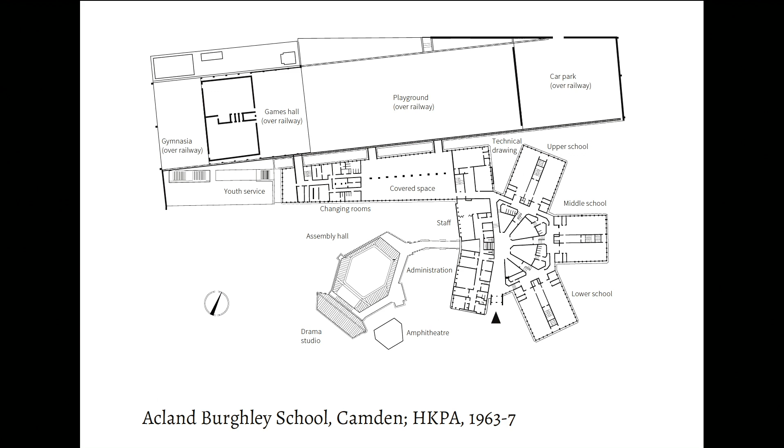Examples in their work include the faceted elevations of the 1959 Churchill College scheme and the prismatic plan of Acland Burghley School. In their work for colleges in Oxford and elsewhere, they applied their expertise in precast concrete to create the more buildable but nonetheless striking form of boxed-out windows, which you see here.

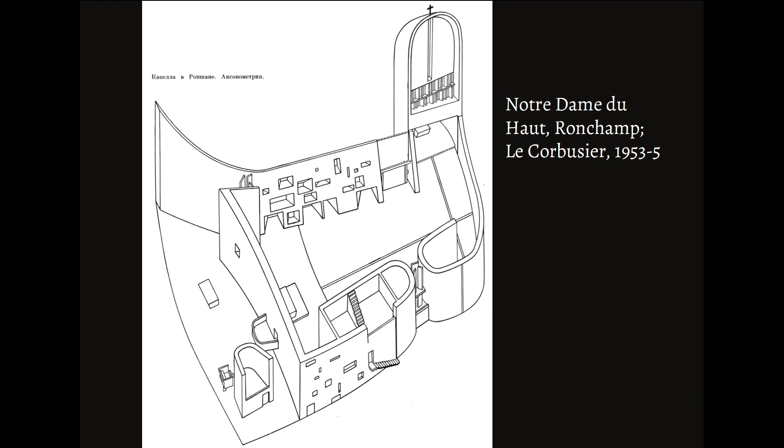Conventionally one would place these trends in the context of the formal freedoms that succeeded Le Corbusier's chapel at Ronchamp and the rediscovery of the pre-war avant-garde. But as I worked my way through the book, it was a revelation to discover that a significant influence on their work during this period was a short-lived but brilliant architect named Edward Reynolds.

He was born in 1926 and died of cancer at the age of 32 in January 1959. Raised in Portugal, he arrived in the London of post-war austerity in 1947. After a protracted period of training, he found his way into the LCC and the mentorship of Bill Howell, who suggested he qualify here at the AA.

He caused a sensation in this building. Peter Cook, a student slightly later, called him the one really original talent of the period, and his influence extended far beyond Bedford Square. In his history of modern architecture, Kenneth Frampton wrote that he exerted a decisive influence on the development of brutalism.

So why has no one heard of him? Today, the name of Edward Reynolds has all but disappeared from living memory. There are only now a few people who knew him firsthand. The story that follows has had to be pieced together from small fragments and clues. It's an incomplete picture, but nonetheless, I think, an intriguing and important one.

Edward Louis Reynolds was the second of 4 children from a well-to-do Anglo-Portuguese family. 2 Reynolds brothers emigrated to Portugal in the mid-19th century, where they established a successful business trading cork and wine. But Edward's mother claimed that he took after her side of the family, who were related to the aristocratic Conde de Benet family. He was born and grew up in Cascais, a coastal town 30 kilometers west of Lisbon, and attended St. Julian's School in nearby Carcavelos.

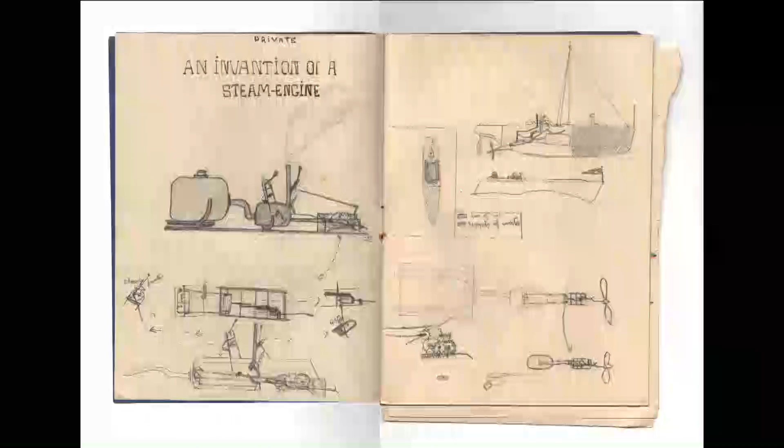His exercise books from his school days are filled with drawings of boats, mechanical inventions, landscapes, people, and horses, but there are also sketches of strange rustic houses accompanied by precisely annotated plans. And he started to study architecture off his own bat.

Reynolds' architectural ambitions were encouraged by his family, and after the war, his aunt Christina arranged for him to be articled for 6 years to S.B. Caulfield, an architect based in South Kensington, while he studied part-time at the Regent Street Polytechnic School of Architecture. Reynolds arrived in London in August 1947, 4 days before his 21st birthday.

Sidney Burgoyne Kitchener Caulfield, then aged 70, was a living link to the Gothic revival and the arts and crafts movement, having been articled to J.L. Pearson and led the Department of Architecture at the Central School of Arts and Crafts from 1910. He talked of W.R. Lethaby, Edward Johnston, and Eric Gill. But by 1947, his practice was subsisting on war damage reparation work and must have felt as much of an antiquity as the system of pupillage itself.

Reynolds befriended 2 bright young assistants. The first was Arthur Baker, who in 1950 went on to join the LCC Architects Department, working under Bill Howell, Gillian Sarson, John Killick, and Sandy Wilson on housing projects. It may be that Arthur Baker introduced Reynolds to this group, although he doesn't now recall doing so.

The Poly was a conservative school. Its continuing commitments to the orders and to line and wash renderings can be seen from Reynolds' second-year Doric study. It was run by older, rather remote figures. The classicist John S. Walkden was the overall head of the school, with Gordon Topliss and Robert Meadows in charge of the day and evening schools, respectively.

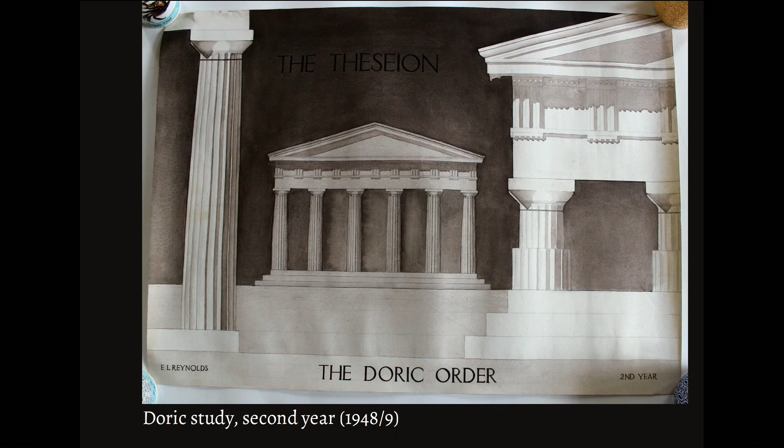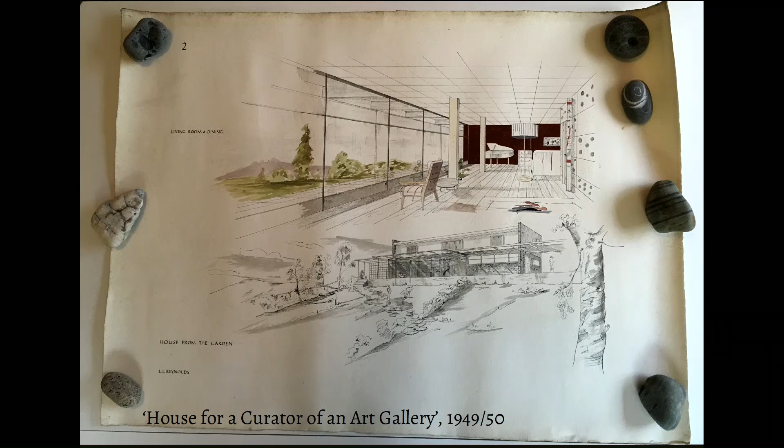The younger tutors, however, tended to be practitioners with a closer connection to the modern movement. Despite this somewhat less than inspiring environment, Reynolds' drawings suggest that he was navigating his own course through a changing architectural landscape. His third-year project, A House for a Curator of an Art Gallery, with its concertina glass screen, rubble end walls, and timber pergola, suggests the vernacular modernism of Bentley Wood, Serge Chermayeff's pre-war house, or the houses designed by Marcel Breuer after his arrival in the United States, while the render and framed picture windows perhaps reflect a Scandinavian influence.

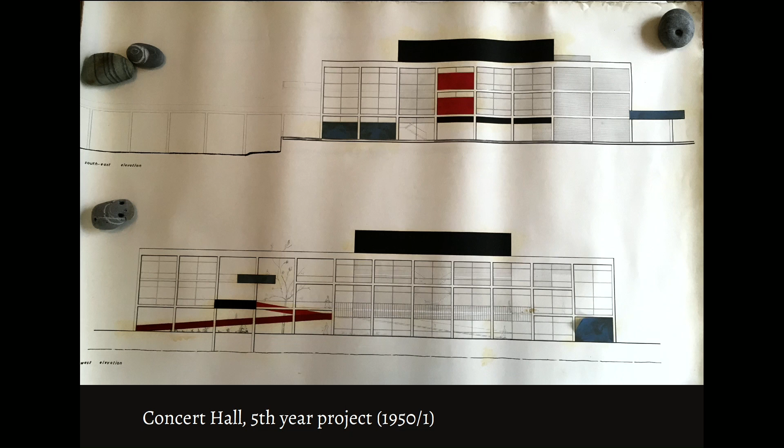By 1951, the year of the Festival of Britain, a pure rationalism is apparent in his fifth-year project for a seaside concert hall, in tune with his hero Mies van der Rohe, the Smithsons' Hunstanton School, and their efforts to 'find out how to use Mies's methods without any mannerism.' This seems to be a reinforced concrete frame, a material he would become strongly associated with. The ramps and balconies threaded through a square grid of columns suggest an awareness of Giuseppe Terragni, while the pier-like structure seen on the top right seems to extend out into the sea. The scheme is rendered in a single thin line, with Mondrian-like blocks of primary colours pasted on.

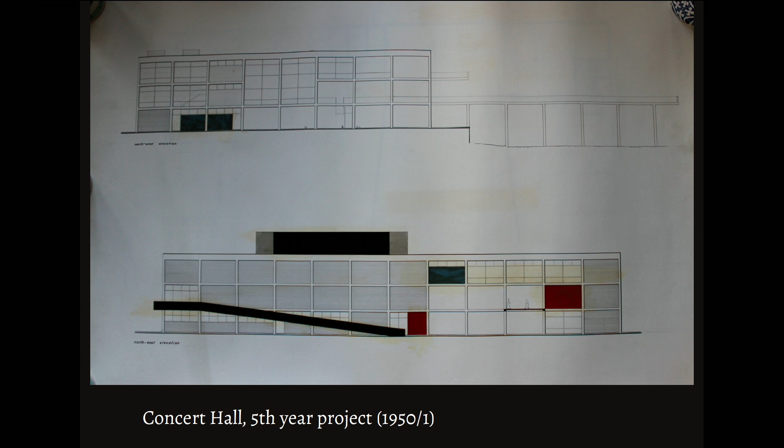His contemporary project for a debating hall at Regent's Park is a full-bloodedly brutalist essay in board-marked concrete, complete with random fenestration and exposed downstand beams.

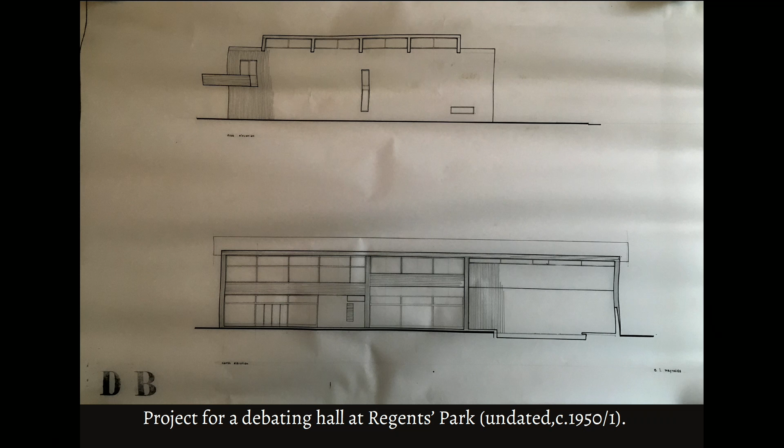Reynolds left the Regent Street Poly in about 1952, having gained the RIBA intermediate qualification. He next took a short-lived job with Tripe and Wakeham, a firm then specialising in industrial and newspaper buildings. Peter Womersley was working there at about the same time.

In October 1953, Edward got married to his fiancée, Anne Russell. She was an interior designer from Northern Ireland, working for Casson & Conder, later at the furniture and display section of the LCC Architects Department. Edward had met Anne through a friend from the Polytechnic, to whom she was then engaged. He introduced himself as Pedro, and only later did she find out his real name. Much later, some of his colleagues and acquaintances would refer to him by the same nickname. Perhaps England brought out his Portuguese side, and vice versa.

In March 1954, Reynolds joined the LCC Housing Division, then at the peak of its post-war reputation. He was soon assigned to the team working on the Roehampton Lane estate, later known as Alton West. This group was headed by Colin Lucas, pre-war renowned as one-third of Connell, Ward and Lucas, but directing the design were Bill Howell, John Killick, John Partridge, and Stan Amis. Partridge had entered the LCC in the 40s at age 18, but the other three were ex-servicemen who'd met at the post-war Architectural Association.

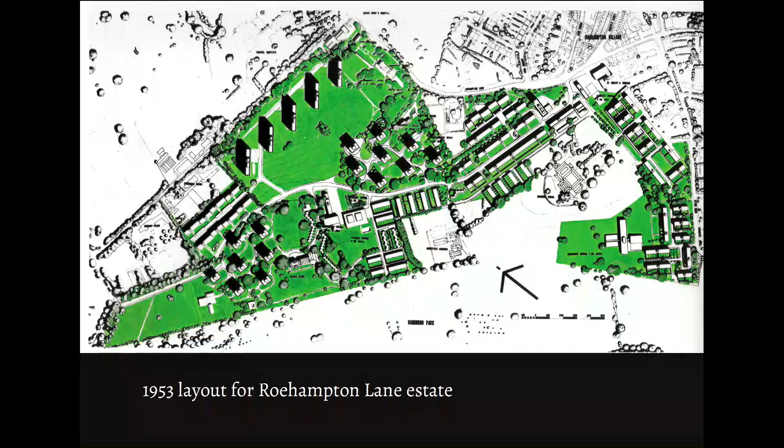Their concept was based on Le Corbusier's unrealized plan for Saint-Dié, combining groups of tall blocks with short terraces to preserve a fine landscape while maintaining a relatively high density. By the time Reynolds arrived, their layout had been approved by the council, and Howell, Killick and Partridge were overseeing detailed design and construction. Reynolds was one of a number of assistants in the team, a role more associated with drawing than with designing. Nonetheless, he was allowed to make two significant creative contributions.

The first concerned Howell's five 12-storey maisonette blocks that stand sentinel over Richmond Park. Their imagery and proportions were clearly derived from the Unité d'Habitation in Marseille, although their planning and internal layout were quite different. In place of the Unité's colossal pilotis, a grove of slender cylindrical supports was substituted for pragmatic reasons, more akin to Corbusier's pre-war work.

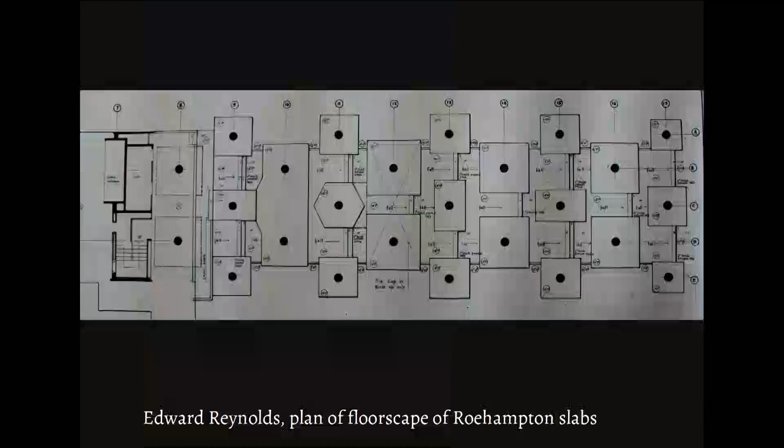For the teams designing a large housing complex, the drawing out and detailing of standardized bays and plans was occasionally relieved by a piece of one-off design. The brutalist jeu d'esprit of the Roehampton boiler house proudly proclaims the district heating system, which served the tall blocks on the estate. A boiler house, based on its specifications, was one of the AA projects set for several years by fourth-year unit master John Killick.

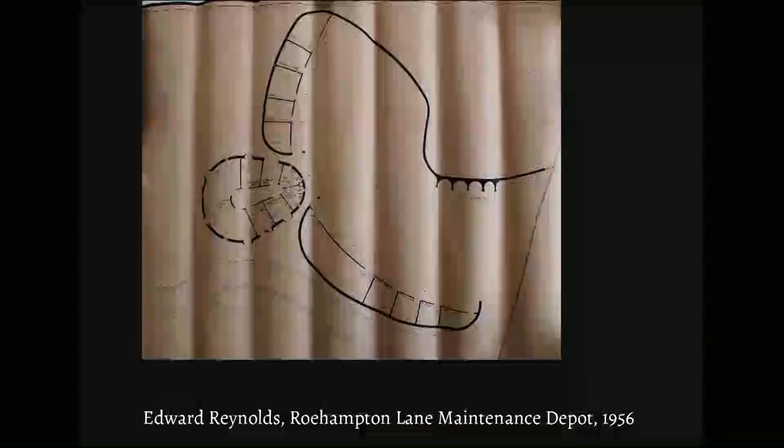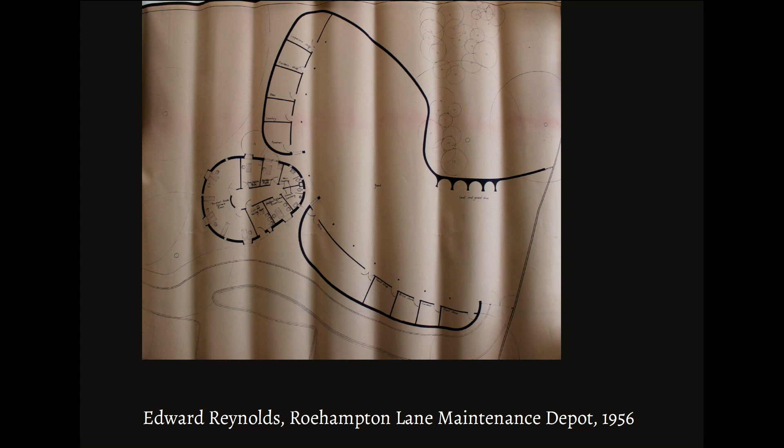Reynolds was given a free hand in the design of another ancillary building at Roehampton, the maintenance depot. His original design of March 1956, seen here, has recently been rediscovered. A modified version was published in 1959, but it was never built. The works yard is enfolded by curved screen walls of board-marked concrete, studded with randomly disposed boxed-out windows. A blob-like pod of offices pushes into the membrane-like perimeter wall, like a collection of cells under the microscope. The curvilinear plan hugs the contours of a sloping site and skirts around mature trees. Its sculptural form and elaborate fenestration was presumably justified by the fact that it would have been overlooked by adjacent housing.

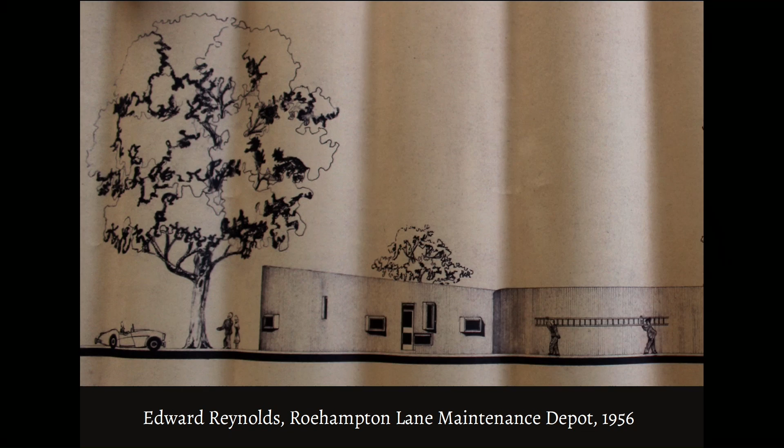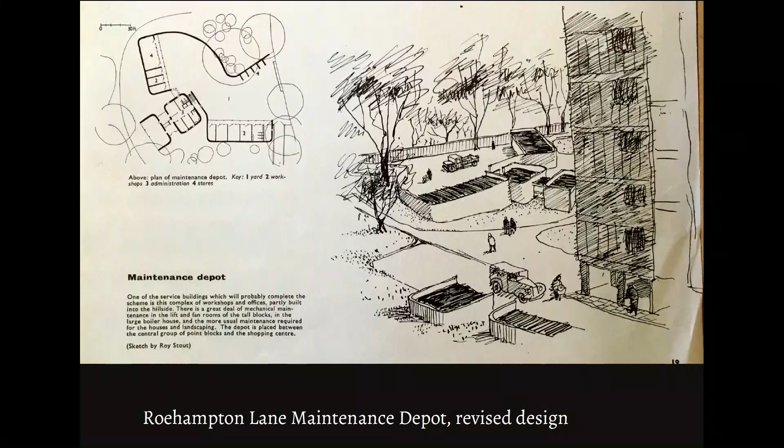After Reynolds left the LCC, his design was rationalized, with the freehand curve straightened and boldly radiused corners added. Writing in the AA Journal, Howell describes Reynolds' design as an interesting piece of early 'curly' - apparently an AA term of the period. John Partridge associated it with the fifth-year tutor, Peter Smithson, and his disapproval of post-Ronchamp formalism at the AA. Partridge's own 1958 competition entry for an infant school at Wokingham clearly shows the influence of Reynolds' design.

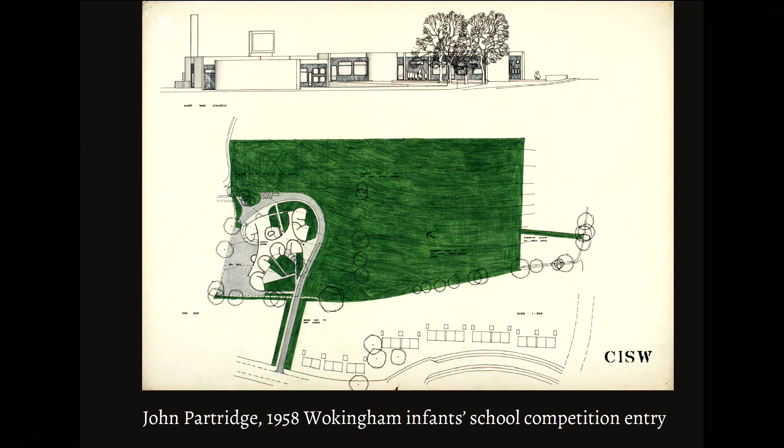Roy Stout, another assistant in the Roehampton group, sat at the next drawing board to Reynolds and remembers him working on a personal project - we're not certain what - which already combined Corbusian influences with his own non-right angle geometry. He clearly had creative potential, yet, according to Howell, he was suffering from low morale or self-doubt. Howell encouraged him to complete his architectural qualifications at the AA, where Killick was by then fourth-year master. Edward Reynolds gained a major county award and enrolled at the fourth year of the AA in autumn 1956.

But before looking at his AA projects, I want first to explore his network of contacts in that period. Reynolds was 30 when he entered the AA, a mature student and older even than most of the ex-servicemen who arrived at the post-war AA. Bill Howell, for example, was 26 when he joined the fourth year in 1948.

Students in the upper years tended to spend less time here at Bedford Square than the earlier years, doing much of their designing at home. Yet Reynolds' presence at the AA was noted by James Gowan, a third-year tutor, who wrote: 'In the studio, as I bludgeoned my students into action with customary delicacy, Edward Reynolds, a year or so ahead and working on his elegant projects, would look up from time to time and exchange a quiet smile.'

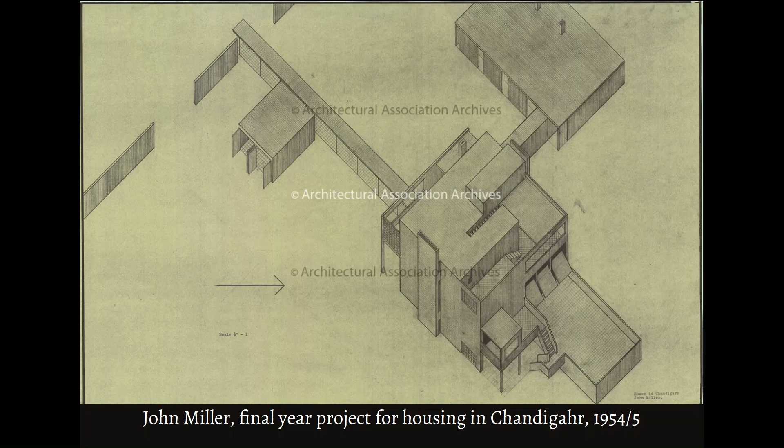The classic example of this is the 1950 cohort, which included Patrick Hodgkinson, Neave Brown, John Miller, Adrian Gale, and Kenneth Frampton. By 1956, however, Principal Michael Pattrick could already draw a distinction between the students of the immediate post-war years, with their belief that prefabrication and the machine might impose order, and a recent trend towards a coarse and robust architecture.

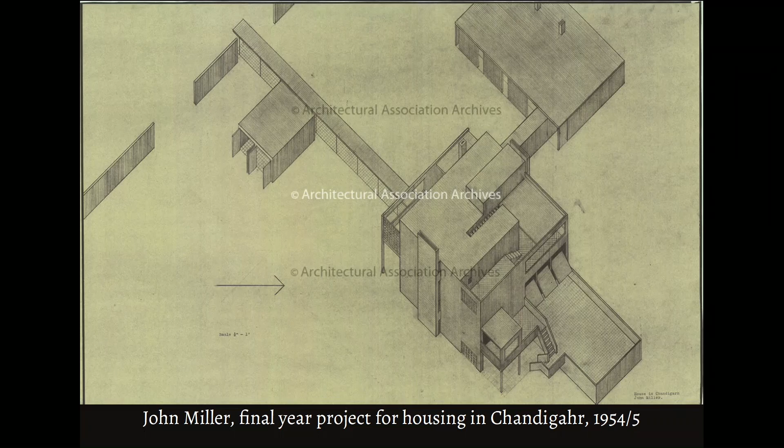Characterized by solid walling and small, irregularly disposed windows. The third-year tutor, the late Leonard Manasseh, attributed the 'farouche air' of that year's summer exhibition to a rush of Ronchamp to the head. Of the following year's summer exhibition, dominated by the work of Reynolds and his friend Carregat, Pattrick commented: 'Today, the general mode of expression is for the irregular, the severe, the brooding, and sometimes the convulsive.'

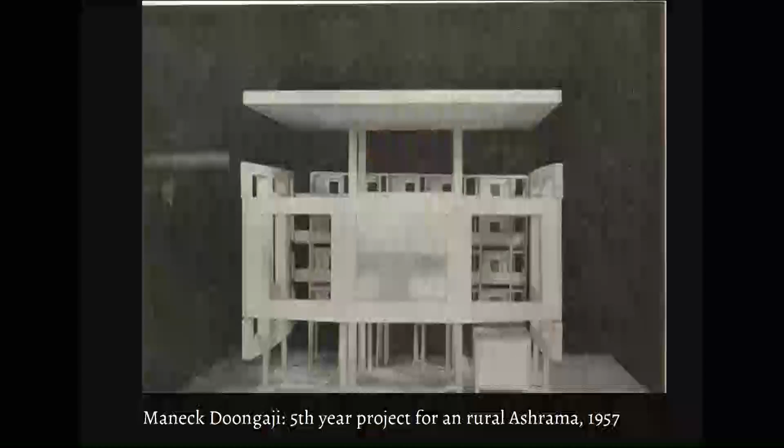Along with late Le Corbusier, there was a renewed interest in the Mediterranean, the East, and so-called primitive art. Manasseh also drew attention to a growing interest in Antoni Gaudí, citing a strongly modeled project for a city centre in Mumbai by Maneck Doongaji. Doongaji's final year project for a rural ashrama in Mumbai state dazzled everyone, recalled Gowan. The design, an open-work concrete cube with a curved parasol, was like an exploded diagram of Corbusier's governor's palace at Chandigarh.

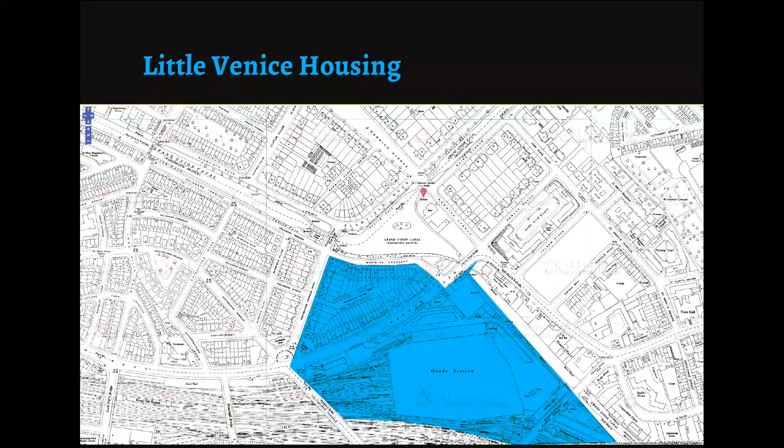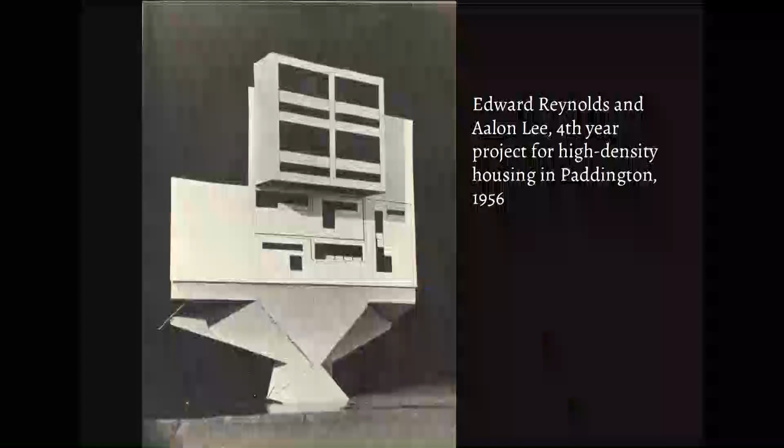Aalon Lee came from a wealthy Shanghai family who fled to Hong Kong after the Communist Revolution. We know almost nothing about the project. No drawings are known to survive, and the sole piece of evidence is a single photograph of a rather rough and ready cardboard model. It's described in one publication as a part model, which implies to me that the model is a portion of a larger scheme. In any case, it shows a four-story structure raised on a vaulted undercroft. Underneath a unité style of projecting balconies is a disordered array of L-shaped windows. Perhaps this represents the front and back walls of alternating maisonettes.

The concert hall at Trafalgar Square is Reynolds' best-known work. In Peter Cook's estimation, it was, and is, the most original shape to have come out of the AA during the second part of the 20th century - 'somehow total, somehow inimitable.' It was completed in the spring term of 1957 as a group project with Aalon Lee and Paul Drake. Drake, too, had made the transition from the Regent Street Poly to the AA. He met AA graduate Peter Ahrends while working for Slater, Moberly and Uren on Sanderson House, and spent the rest of his working life at Ahrends, Burton and Koralek.

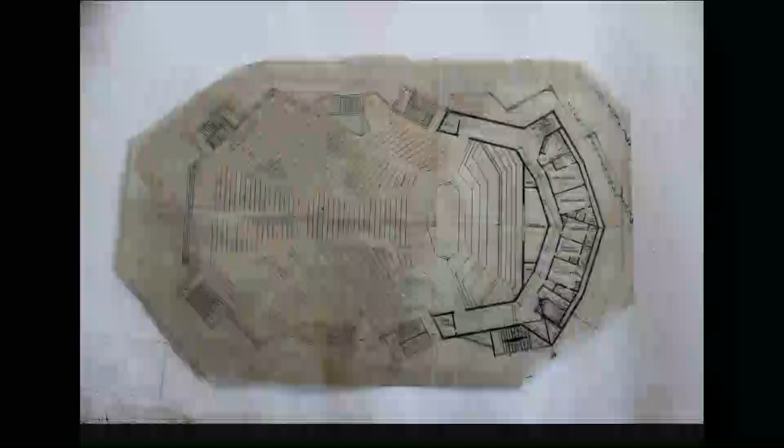The project was based on the so-called Hampton site next to Wilkins' National Gallery, the Hamptons department store having been cleared after bomb damage. It was for many years a car park until it was redeveloped, of course, as the Sainsbury wing of the National Gallery. In his youth, Reynolds had enjoyed going to Lisbon's Opera House. According to Paul Drake, he was not much interested in music, but fascinated by people. The plan of the AA concert hall was as much based on the ritual of concert going - the arriving, the socializing, the people watching - as it was on the performance.

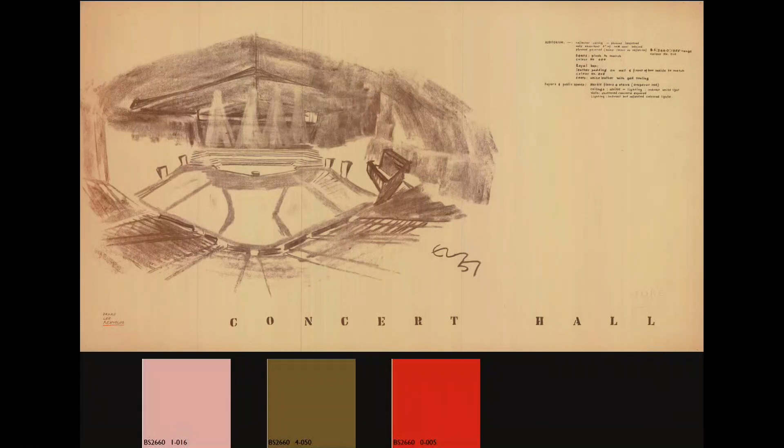By splitting up the seating into angled groups, the intention was that the audience could see each other and their reactions to the performance. The faceted treatment of the exterior was justified by the auditorium design with its steep rear rake, angled rows, and acoustic reflector ceiling.

We have some of these drawings on display here. The auditorium was to be lined in lacquered plywood, a hazy mauve in colour, with olive green velvet seats, and a royal box in poppy red padded leather. Reynolds' specified colour references can be seen at the bottom of this slide.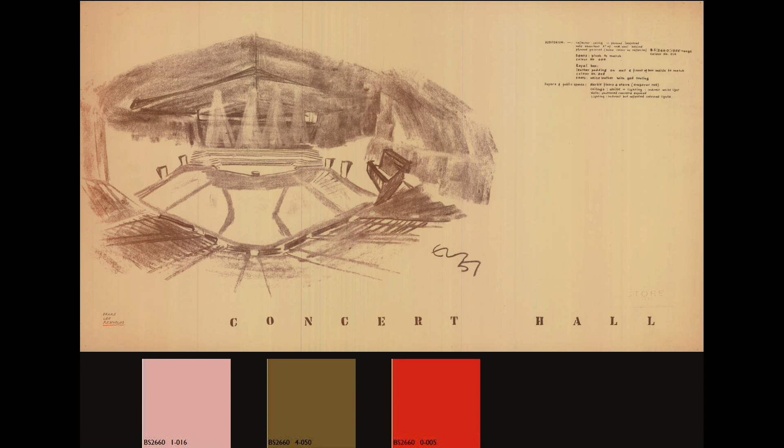The foyers and other public spaces were of exposed, shuttered, reinforced concrete, with marble floors, emperor red stairs, and indirect reflected coloured lighting, implied by his sketch here.

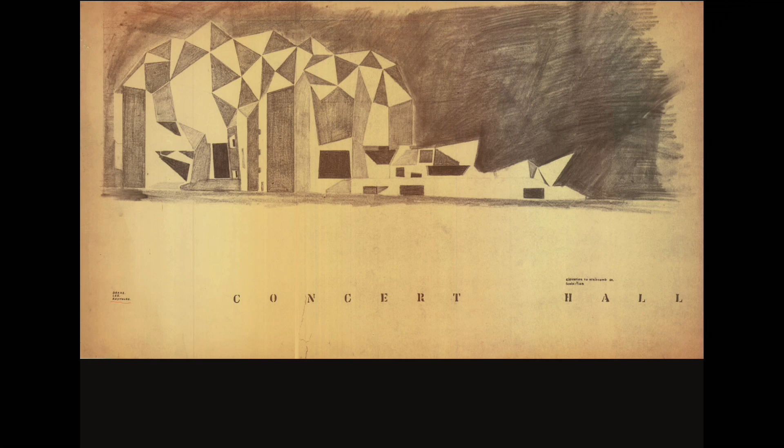According to Drake, the group never decided on the exterior finishes, wavering between shuttered concrete and white mosaic, the latter perhaps reflecting their interest in Lasdun's Royal College of Physicians.

The complex internal circulation was based on their observations of the way people moved diagonally across the site between Trafalgar Square and Piccadilly Circus. Wide flights of stairs, serving those coming from Trafalgar Square, from Piccadilly, and from a basement car park, funneled concert goers into an asymmetrical foyer dominated by a cranked stair.

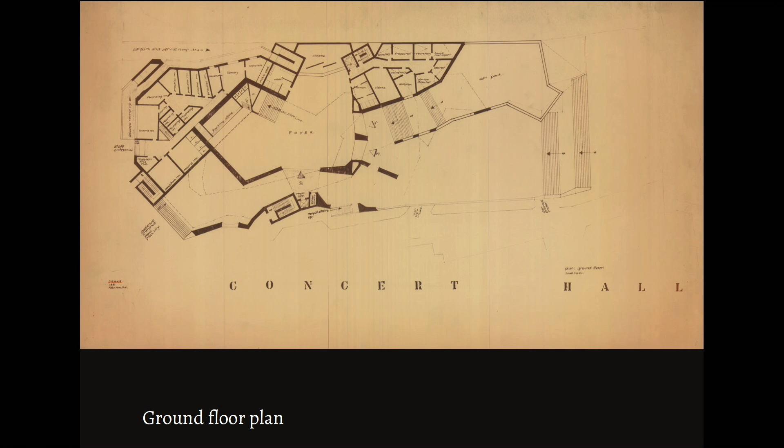The processional route continued to a first-floor ambulatory with views over the square and access to pairs of external staircases serving the auditorium. The spiraling, vortex-like circulation pattern and off-center entrances were played off against the bilateral symmetry of the external form. The idea of the route as an organizational device owes much to the Smithson schemes for Golden Lane and Sheffield University.

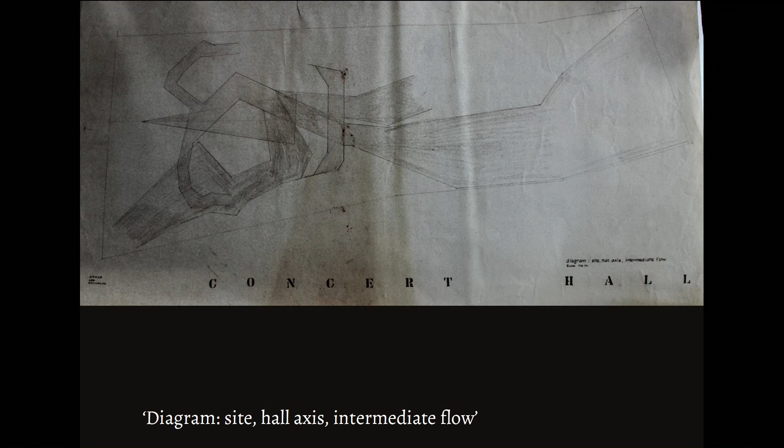The scheme is contemporary with Hans Scharoun's winning competition entry for the Berlin Philharmonic Concert Hall. The latter was designed in 1956 and published the following year. We don't know if the trio saw it, although Drake would later comment, 'We wanted to do then what Scharoun was to do 10 years later.'

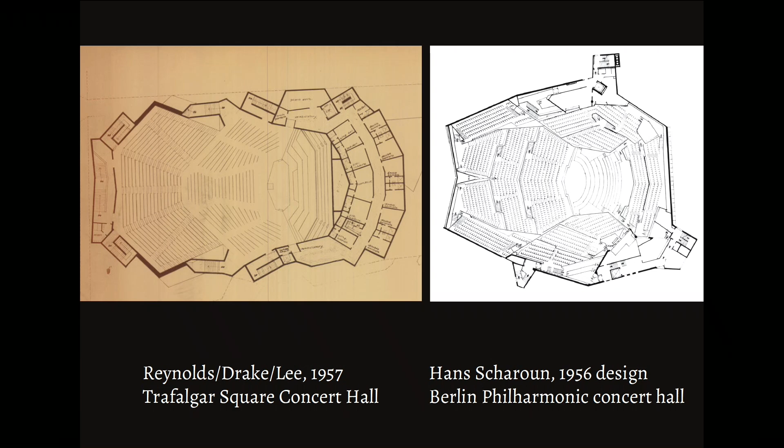There's a similar combination of symmetry with an expressionist angularity. The engineer Frei Otto called Scharoun's auditorium the room of 1,000 angles. But there are important differences. At the Berlin Hall, on the right, the stage is pulled forward so that the orchestra is in the round, with seating broken into angled banks of between 100 and 300 people, creating a still more dynamic treatment of sightlines.

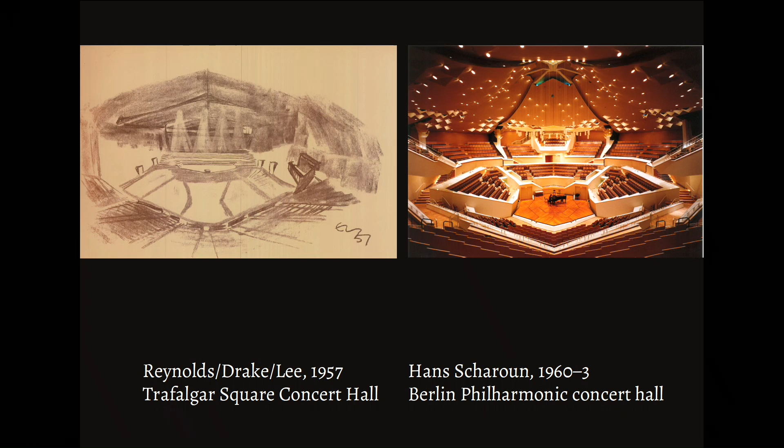The parallels with Hans Scharoun also raise the question of the influence of the organic functionalism of Scharoun and Hugo Häring on this generation of architectural students. In the late 50s, Peter Smithson was introducing his students to Adolf Meyer, Hannes Meyer, Mart Stam, and Hugo Häring in lectures that would later be published in 1965 as 'The Heroic Period of Modern Architecture.'

Expressionism also had an illicit appeal, and Reynolds' charcoal renderings for the concert hall certainly recall Erich Mendelsohn's early sketches. Key features of the Trafalgar Square Concert Hall — its mammal-like bulk, its articulated skin of triangles, and the route as generator of its internal organization — were influenced by another competition entry of 1956.

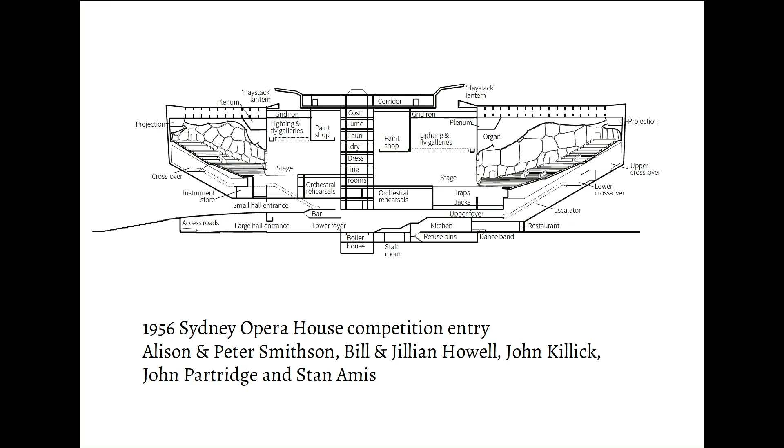Alison and Peter Smithson, Bill and Jill Howell, John Killick, John Partridge and Stan Amis joined forces to enter the Sydney Opera House competition. Published in March 1957, this scheme was well known in AA circles. The two auditoria were canted from a central core, with escalators splaying out from foyers deep within the building.

As at the Trafalgar Square Concert Hall, the raking auditoria generated the external form, in this case evoking a huge hulk beached on Bennelong Point. Howell and Killick joked about their 'aircraft carrier phase.'

The submission text reads, and I quote: 'The aesthetic is an architecture of facets, of irregular planes which envelop the whole building, outside and inside. The right angle is treated as a precious thing.'

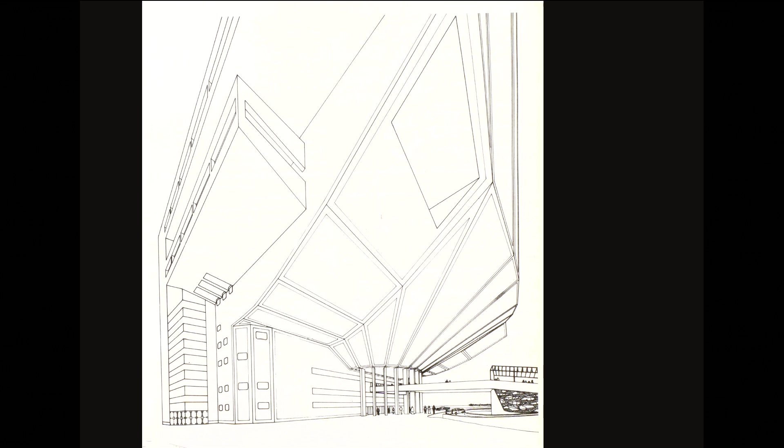T.S. Khareghat, who assisted with the drawings, went on to explore faceted ship-like forms in his AA project for Southampton Ocean Terminus.

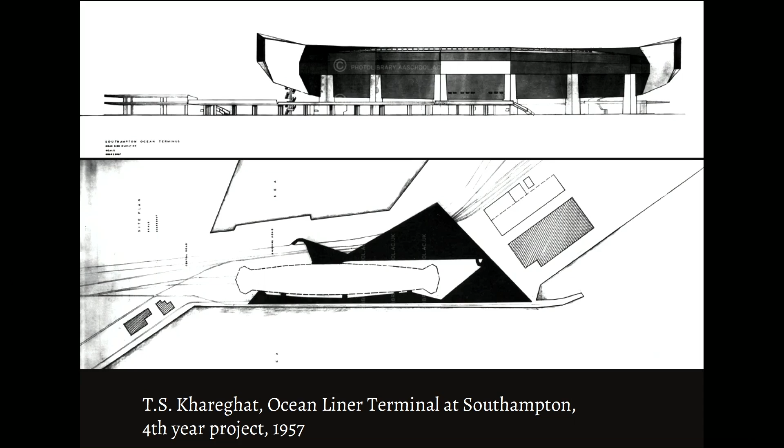These schemes can be seen as part of a wider interest in comparative anatomy and biological pattern and form that has a long history. The post-war interest of AA students and the Independent Group in 'On Growth and Form' by the Scottish biologist D'Arcy Thompson is quite well known, while Bill Howell and others drew inspiration from Viollet-le-Duc's illustration of a bat's wing.

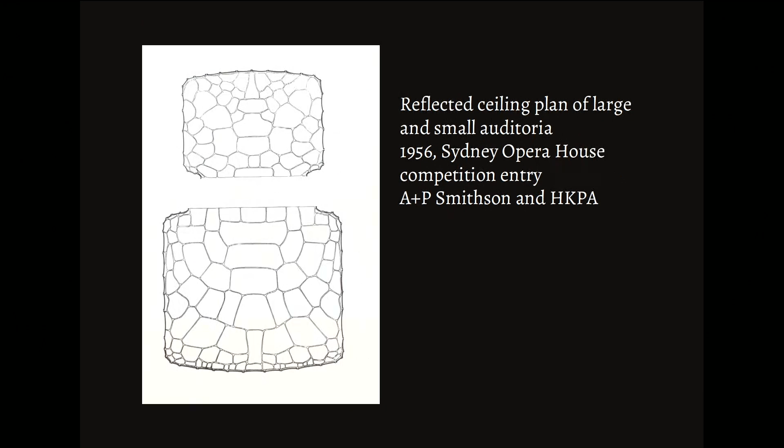In designing the interior of the Sydney auditoria, Alison Smithson studied the physiology of tortoise shells. The lining was conceived as a jointed shell of red lacquered plywood, like a tortoise or armadillo inside out.

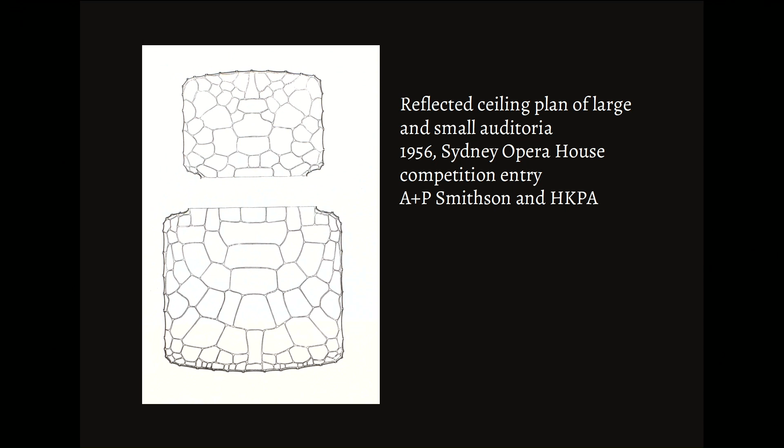Alon Lee also had an interest in living architecture, having studied zoology as an undergraduate in Shanghai, at one point keeping a crocodile in his bathtub.

This sort of architectural vitalism also flourished at the Poly, encouraged by the young practitioner tutors Howell, Stirling, and Douglas Stephen. In 1957, John Outram and Wilfred Marden started a student magazine called Polygon.

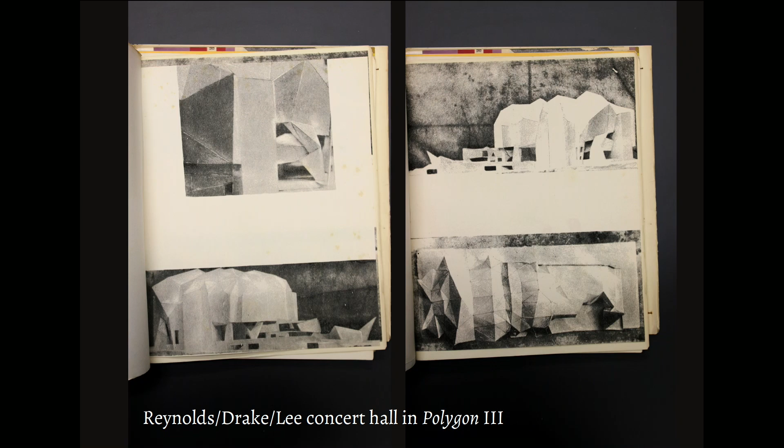Its third issue included the Reynolds-Drake-Lee Concert Hall, a zoo by Outram and Marden, and three Bowellist projects for the Furniture Manufacturers Association by Michael Webb, John Davison, and Robert Marney. Webb's project was featured in the pages of the Architectural Review, a radio talk by Nikolaus Pevsner, and was exhibited in the 1961 Visionary Architecture Show at the New York Museum of Modern Art. He would later, of course, become a member of the Archigram group.

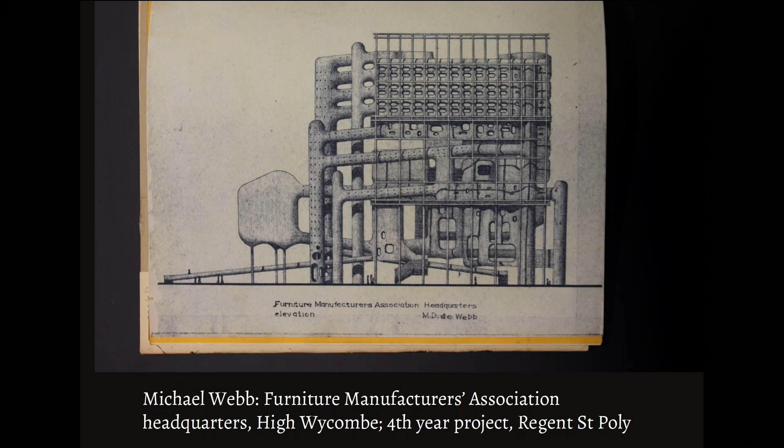At Howell's suggestion, Outram and Marden transferred to the AA. Outram described his 1959 Westminster Concert Hall as, I quote, 'like a bumblebee with VTOL boosters,' with cladding like a rhino with a hide made of blued steel.

It may have elicited the legendary remark by John Killick: 'You seem to have produced a bad building and a rather good armadillo.' Warren Chalk of Archigram later wrote of the zoomorphic trend, quote, 'Capture an armadillo, put a plan inside it, watch it writhe, and a transformation takes place between architecture and magic.'

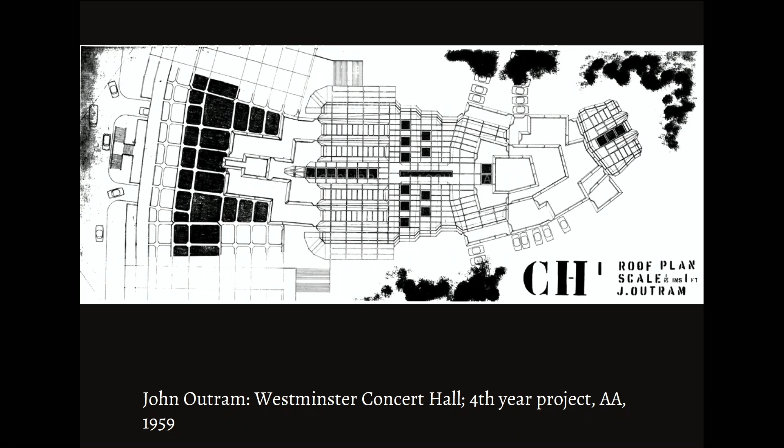Many of these schemes, including the Reynolds Concert Hall and others I haven't got time to go into, were collaged on the front cover of Archigram 1, establishing a connection between them, the Hayward Gallery, designed by an LCC team including Chalk and Ron Herron, and Ron Herron's Walking City proposal of 1964.

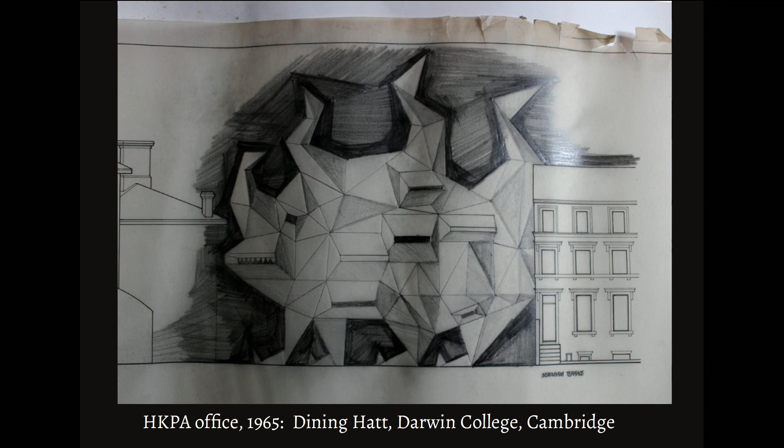Charles Jencks offered the sister term Howellism, characterized by pedestrian flow and erupted skin. HKPA's enjoyment of Reynolds' faceting and animal forms was acknowledged in this 1965 sketch, produced in the HKPA office as part of an in-house ideas competition for Darwin College, Cambridge.

Reynolds' fourth-year project was a storage and dispatch warehouse for SPD Limited, a transport subsidiary of Lever Brothers, which developed refrigerated insulated vehicles to carry frozen foods. The name was chosen by Lord Leverhulme and stood for Speedy Prompt Delivery.

The students were allocated a cramped bomb site in Bristol's industrial quarter, overshadowed by a railway bridge over the feeder canal. A steady level of illumination was required, but without direct sunlight and without solar gain. The traditional solutions, a north-light roof or a sawtooth roof, were complicated by the northeast-southwest alignment of the site.

Reynolds' roof has angled north lights spanning diagonally between transverse folded plates. In geometrical, although not structural terms, the repeated asymmetry recalls the crazy vault over St. Hugh's Choir at Lincoln Cathedral. The SPD roof is as light and crystalline as the concert hall is heavy and plastic.

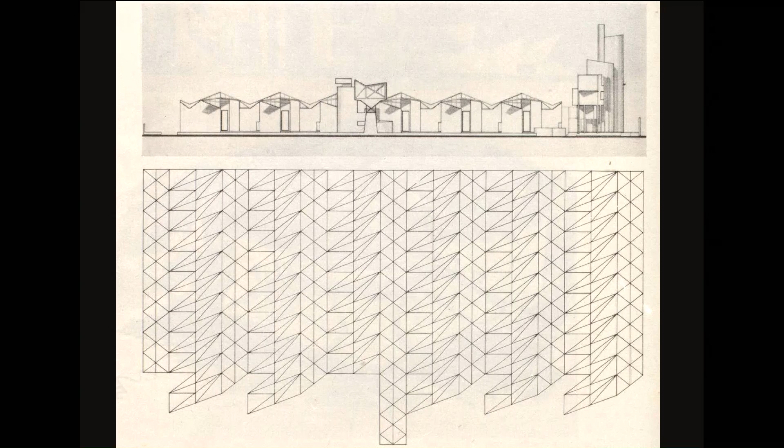The administrative accommodation was piled up to create a vertical feature on the right. This sculptural array of interlocking forms would have presented a prominent sight from the trains pulling out of Temple Meads Station. The contrast between the mundane programme, presumably set to focus student minds on structural engineering and working drawings, and Reynolds' geometric tour de force is pointed.

The project, perhaps informed by Reynolds' experience at Tripe and Wakeham, manipulates the industrial vernacular into a rippling skin of light steel and plate glass. Architects were becoming alive to the anonymous and unselfconscious British engineering tradition precipitated by the Industrial Revolution.

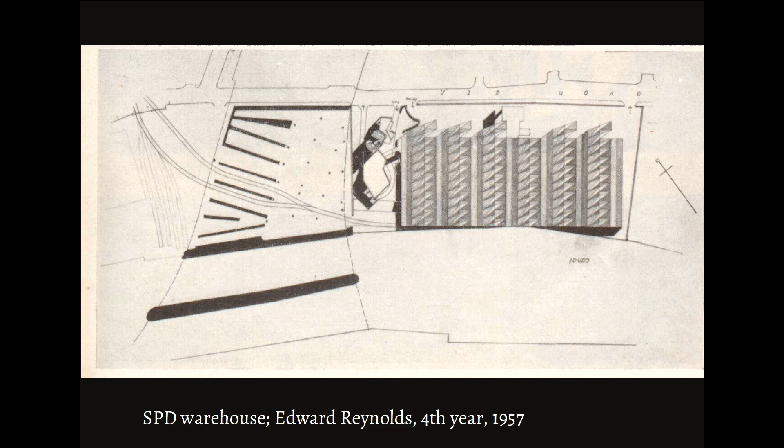The following year, in 1958, J.M. Richards' The Functional Tradition in Early Industrial Buildings came out, illustrated by Eric de Maré's iconic photographs. The impact of Reynolds' design was immediate. Paul Drake cribbed it for his own SPD project.

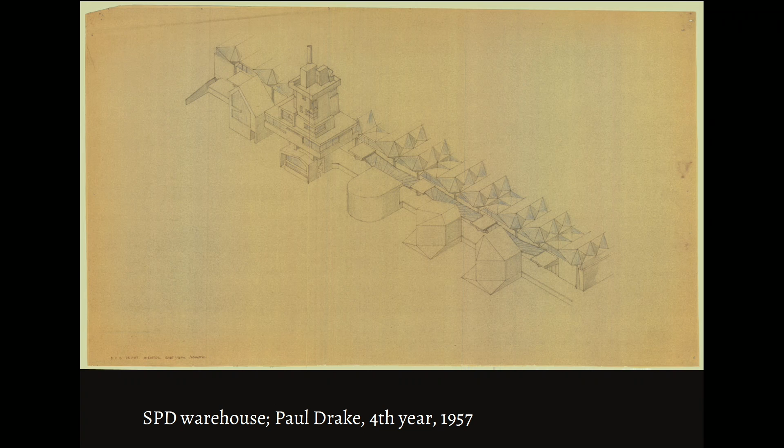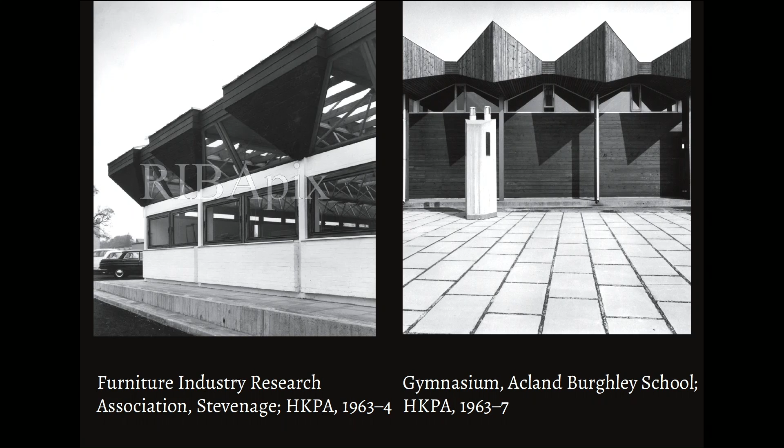Its influence is apparent in lightweight roofs designed by John Partridge for the Furniture Industry Research Association at Stevenage on the left, and for the gymnasium at Acland Burghley School. Far better known, however, is another shed with a folded plate, north-light roof, and a sculptural tower: Stirling and Gowan's Leicester Engineering Building, on the right here.

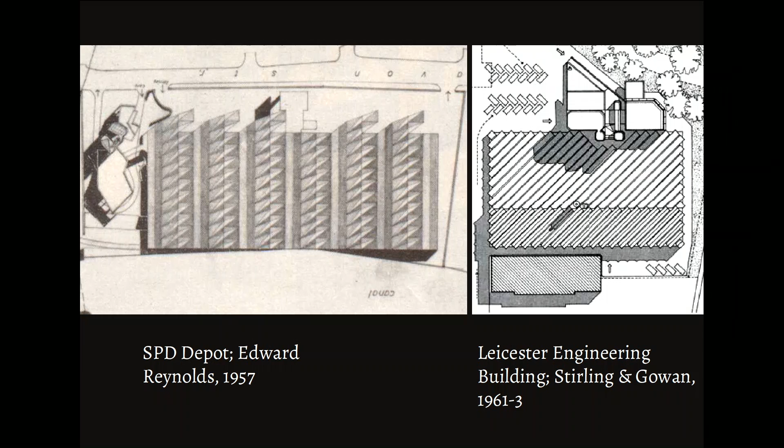Both partners knew Reynolds and admired his work. Peter Buchanan claimed, quote, that Stirling had seen it at an Architectural Association crit he had attended before rushing back to his office to redesign his already well-developed scheme. It's a great story, but the timing doesn't quite fit.

The Leicester Building Committee first wrote to Stirling in June 1959, some two years after the crit. But it was Gowan who led on the design of the workshop block in 1959 to 60, and he told Ellis Woodman, quote, 'Professor Parkes, the head of the department, wanted a north light, which forced you to set the skylights on the diagonal.'

The overhang was derived from a project for a warehouse by a student who was at the AA when I was teaching there, Edward Reynolds. Another connection is the structural engineer, Frank Newby, of F.J. Samuely.

He taught Reynolds structures at the AA and later assisted Gowan with the Leicester roof. Reynolds' influence on Leicester was first remarked upon by Peter Eisenman in his 1975 essay, Real and English, followed by Kenneth Frampton, who illustrated Reynolds' SPD in his Modern Architecture, A Critical History of 1980.

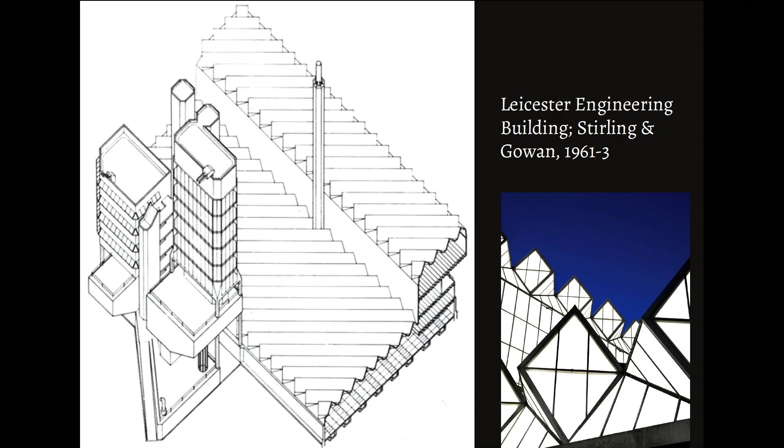Reynolds' final year thesis was interrupted by his illness. After his death, Bill Howell collected up and submitted his drawings so he could posthumously qualify. Each student got to choose their own fifth-year thesis projects, which occupied their second and third terms.

Edward Reynolds' project is entered as distillery in the AA register for January 1959, but this is crossed out and corrected to hotel in Ireland. He returned to the AA in the autumn of 1958 under Peter Smithson, where the project is recorded as a built landscape. The notional site was Mill Cove near Rosscarbery in County Cork on the southwest coast of Ireland.

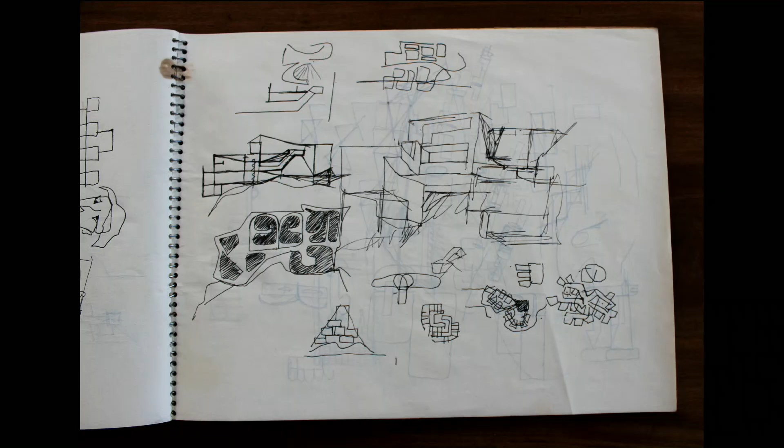Reynolds chose a site and a mixed-use programme which combined scale, complexity, and freedom of expression. Through a sequence of preparatory sketches, it's possible to see the loose programme gradually coalesce into an aggregation of man-made cliffs and caves. Bill Howell, incidentally, was fascinated by caves and by cave dwelling.

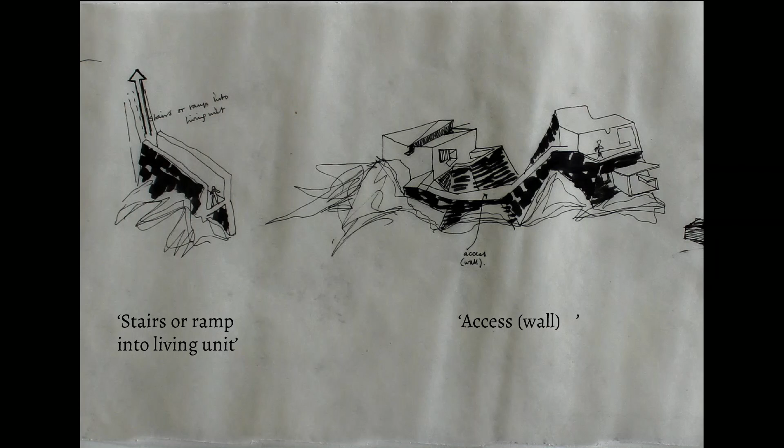A series of informal and spontaneous presentation drawings, probably prepared for a jury, suggests an imaginative, uninhibited, and sensuous attitude to architectural design and to life in general. He imagined a fantasy resort hotel, somewhere to relax, socialize, and enjoy various leisure pursuits.

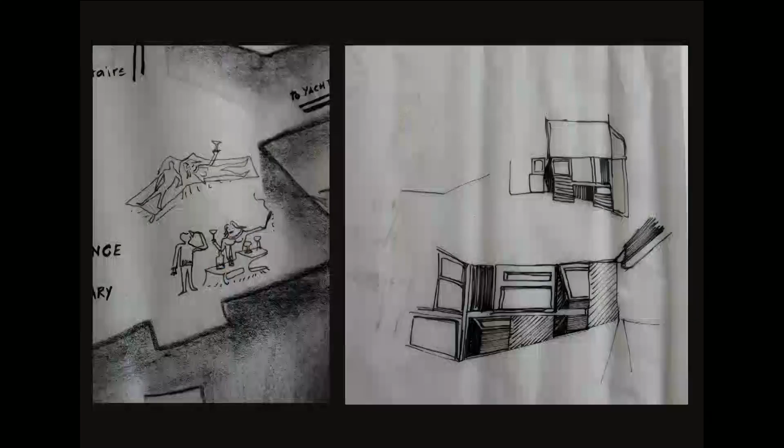In planning the hotel accommodation, he studied Ionel Schein's proposals for a mobile hotel cabin, and perhaps also the Smithson's Appliance House, published in April 1958. Here's a detail of that earlier sketch.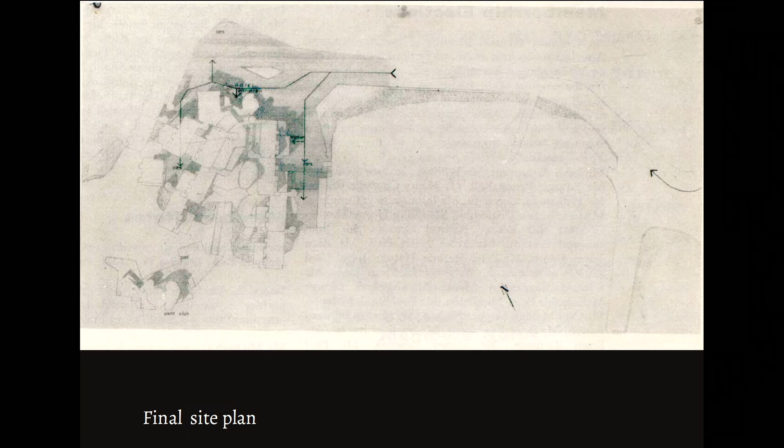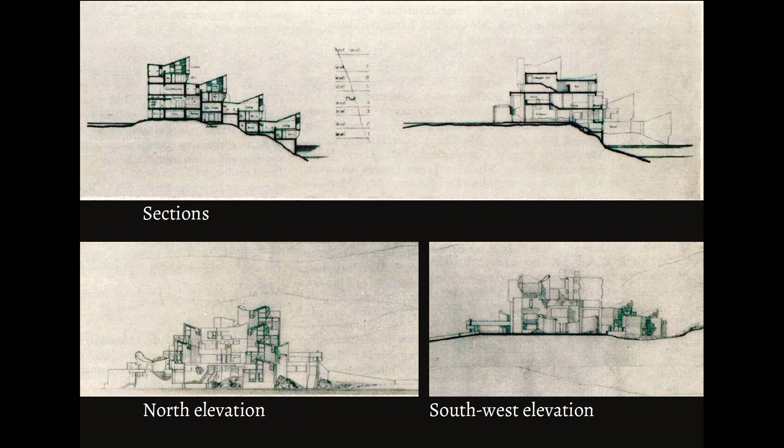As a concrete landscape of articulated terraces, walkways and ramps, it anticipates the brutalist crumble of the South Bank Art Centre, early archigram, and the action architecture trend in America.

An advanced design for 1958, the hotel is simultaneously rational and romantic. It has something of the topographic and accumulative quality of the vernacular, of the Mediterranean hill towns, castles, and coastal fortifications with which Reynolds was familiar.

In his obituary for Edward Reynolds, Bill Howell identified him as a key figure in a, quote, remarkable burst of originality, unquote, at the AA, quote, which produced the most original new look the AA has achieved since the Hertfordshire School wall-span era of almost 10 years ago.

He thus drew a careful distinction between Reynolds' own work and the formalist excesses of the movement associated with him, which he described as a decadent picturesque and a vehicle for personal romantic expressionism, indeed. The crucial distinction Howell implied was the extent to which geometric complexity served the social, functional, and technological ends of the project, as opposed to the purely gestural.

John Killick affirmed that Reynolds' quote, rich, marvelous, organic whole was the more marvelous for its complexity, astonishing plan organization, and complementary form. Rich praise from the notoriously meticulous critic, Killick.